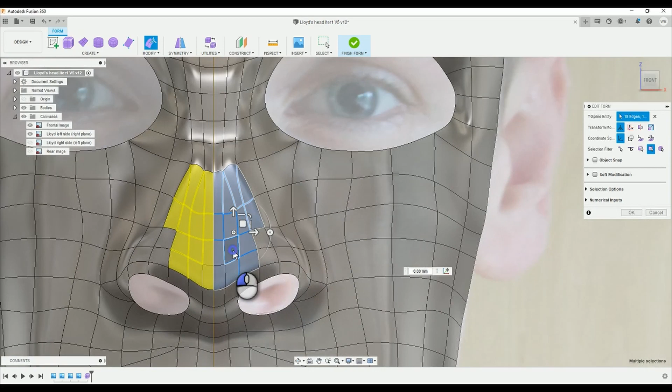In this episode, we're going to begin our transformation from janky 3D face to slightly less janky 3D face. We will begin by extruding the central sections of the nose to match our side profile. It's a simple process. In the same way that we extruded the face, we do the exact same for the nose, working from outside to in.

While we work, rather than focusing on one specific section of the face and taking it to completion, we instead move around the face, adjusting all the features in an order dictated by this rule: what looks the most wrong takes priority. I understand the nose looks wrong, but the forehead looks worse, hence we move to there. In this case, we are softening the curve on the forehead. Drag back as much as you feel is necessary. Remember, nothing is set in stone, so don't panic.

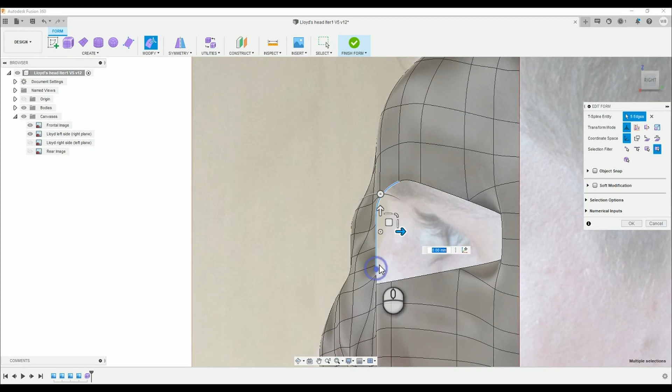We will move on to the eye socket region, since there are no straight lines on the human face, and pull the inner edge backwards, and then eventually pull the outer edge forward, so the shape is a bit more natural. So after pulling those features back, we pull the outer socket forwards. Select an appropriate region and pull it forwards.

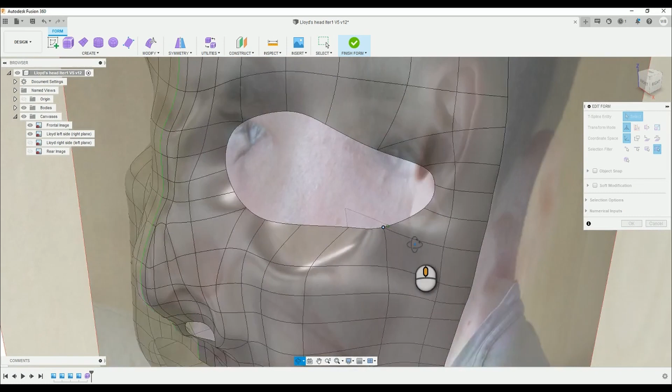If, like me, you create some unwanted curvature, adjust the surrounding vertices to smoothen out the curves, restoring tension to the eye socket. We will adjust the cheeks to remove their sharpness, remembering to zoom out frequently to see what our adjustment will be. And we will continue to restore the fluidity in our lines around the eye socket. Zooming out, we can see the chin is needing a little TLC.

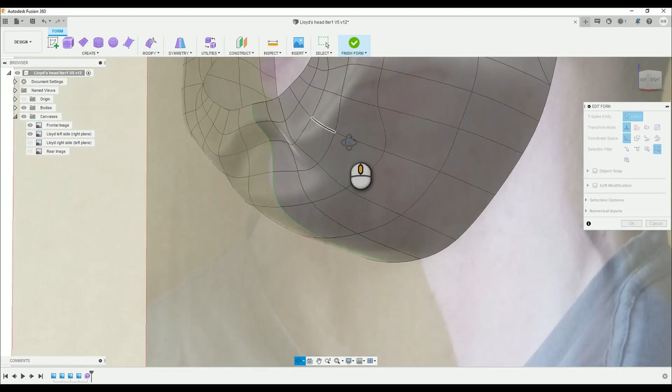Adjusting section groups is the fastest way to fix a major problem. As you can see, we are matching everything to the side profile. Occasionally, modifications are obvious. For example, the area to the sides of the chin need to be pulled back. We group select regions of the face in this area. Knowing which sections need adjusting can be learnt through repetition and practice.

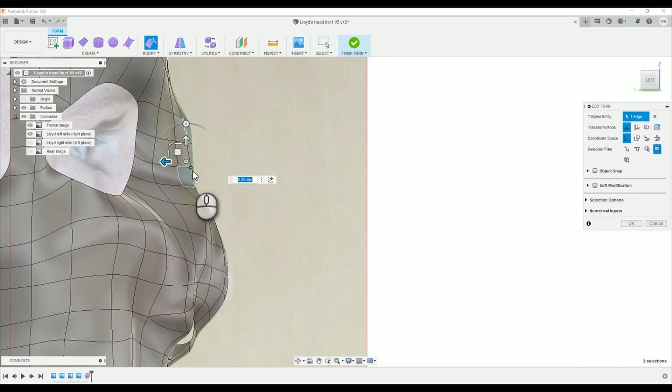We are now at 500% speed. We do some more adjustments to the features. Moving back the edge of the face, adjusting the nose some more, aiming to restore tension. Simple stuff that needs no explanation. So yeah, just pulling points and lines back. See how I'm trying to create just some smooth curvature to it all. Might not even match the nose at this point, but it's just fluidity in the lines. It really is needed when you're modelling.

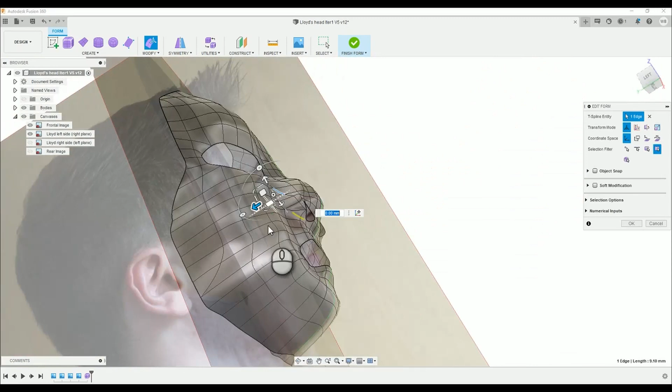So, returning to 100%, we're going to change the nose. It's far too flat and the nostrils point forward instead of down. Since the nose roughly matches the side profile, we need to focus on dragging back the outer nose rather than extruding the centre of the nose forward.

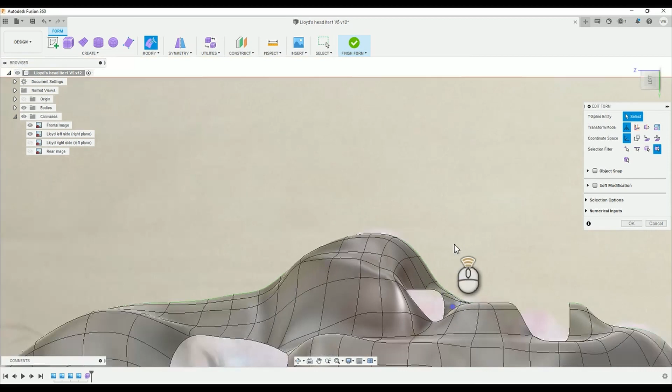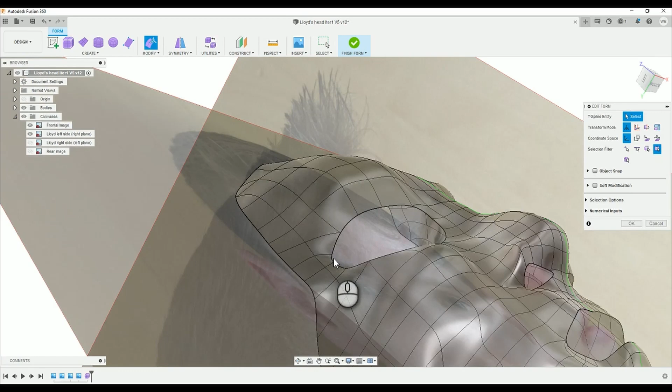The nose is probably the most difficult feature of a face for a beginner, and it will take time. The complexity of it is magnified by the fact that it doesn't change. If your client was eating food, laughing, or bamboozled, almost all the features of the face would change. The cheeks would swell with food, eyes would squint and lips would widen in a fit of laughter. The forehead wrinkles with a raised brow. The nose remains the same. The nose itself isn't particularly difficult to model, but the importance of getting it right is paramount, hence why I would say that it's the most difficult feature for a beginner.

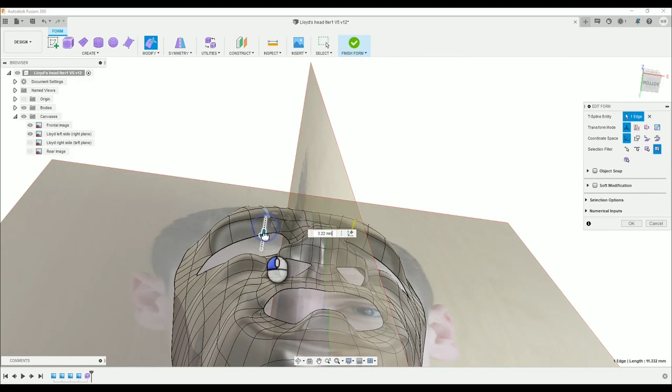Let's make some more changes at 500% speed. Notice how much more human the face is looking since the start of this video. We're a long way off yet, but this is certainly promising. Getting the lips right was something I found really hard on my first head model, but as they have progressed I realise it's one of the easier features. The surrounding area, however, not so much.

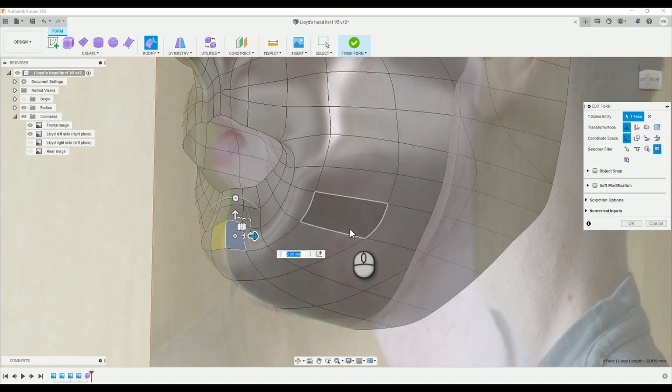Anyway, that's about it done for this video. I hope you're enjoying the tutorial. I'm finding it difficult to figure out what I think is necessary to show and what isn't.